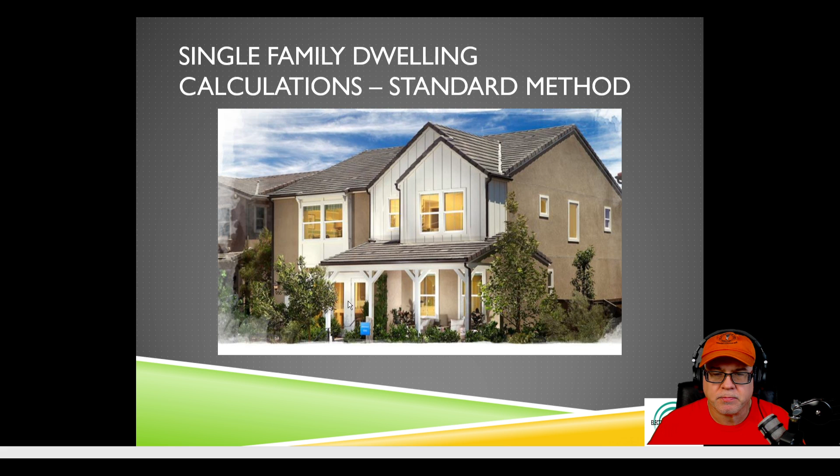All right, so let's look at what we're talking about here. We're going to be dealing in single-family dwelling calculations today, because we just want to make sure that you understand each little component of it, so it's easier to follow along. So where do we actually begin?

Okay, so in a residential application, you probably don't have a design drawing. You probably do have blueprints that you scratch on or draw on with a pen or pencil or something of that nature, right? But you probably don't have any engineered drawings or anything like that. I'm pretty sure you won't. I never have. So where do we begin?

So when we think about the calculation, I always like to say we need to talk about the actual space, how we develop a general lighting and general receptacle use space. And also I should mention, we are talking about the 2017 National Electrical Code tonight, not the 2020. I have to do a new video series for that because there are some changes. So that just creates more videos for me to do to teach people, okay? All right, we love teaching.

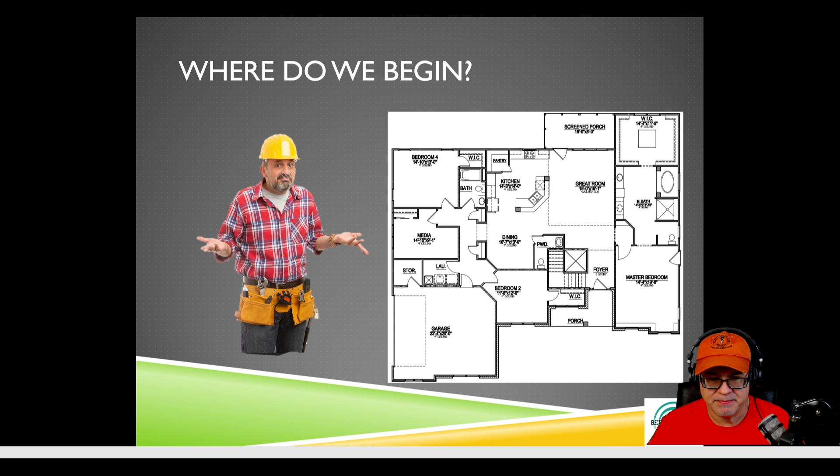All right, so let's look at our scenario tonight in our example. We have a dwelling, and we're going to assume the water heater, clothes dryer, the counter-mounted cooking units, wall-mounted ovens, and electric heating are in kW ratings, and we're going to assume, as the code also assumes, that it is considered equivalent to kVA. So when we're doing these calculations, watts or kilowatts is equivalent to kVA. At the end of the day, we're always going to try to break everything down into VA, okay?

But again, tonight we are going to really focus on a single-family dwelling, and we're going to talk about the standard method. Because like I said, you have to understand the standard, and we'll talk about the pieces. For those that are preparing for an exam, any of those little pieces could be on an exam. So understanding the pieces is the important part of the whole thing, all right? So let's get a little more into the presentation. We've got a dwelling unit. Its outside dimensions are 35 feet by 55 feet.

And we have a front porch that's included within those outside dimensions. Okay, 7 feet by 10 feet, and it's the front porch. And it's actually, like I said, part of those 35 by 55 dimensions.

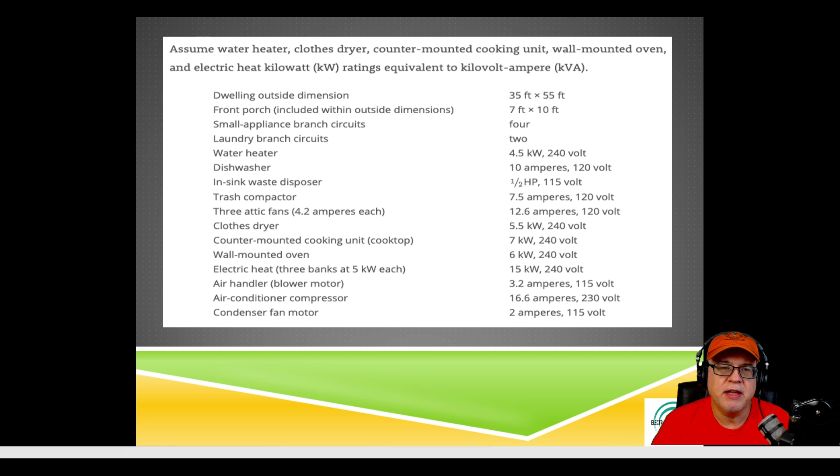Okay. The next thing that we have in our dwelling is an air handler, and it has a blower motor. That's basically what the air handler is. It's 3.2 amperes at 115 volts. Now, as we get into this, remember, that air handler is working whether it's blowing heat or it's blowing AC.

It works either way. So we have to make sure that when we're doing the comparisons that we add that air handler motor in with our heat and in with our air conditioning when we're doing the comparisons. Okay, so there you go.

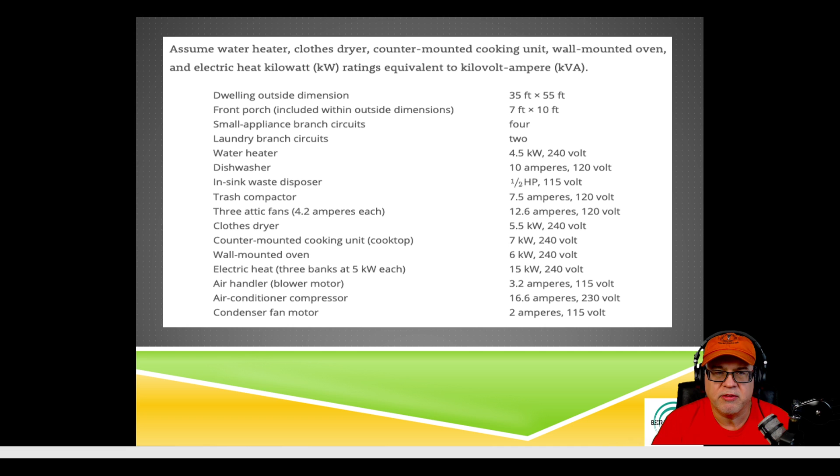The next thing we have, obviously, if we've got this air handler, then we've got an air conditioning compressor. That's outside, and that is 16.6 amperes at 230 volts. Okay, so we have an air conditioner compressor. And then, of course, we have what's called a condenser fan motor as well in that outdoor assembly, and that is 2 amperes at 115 volts.

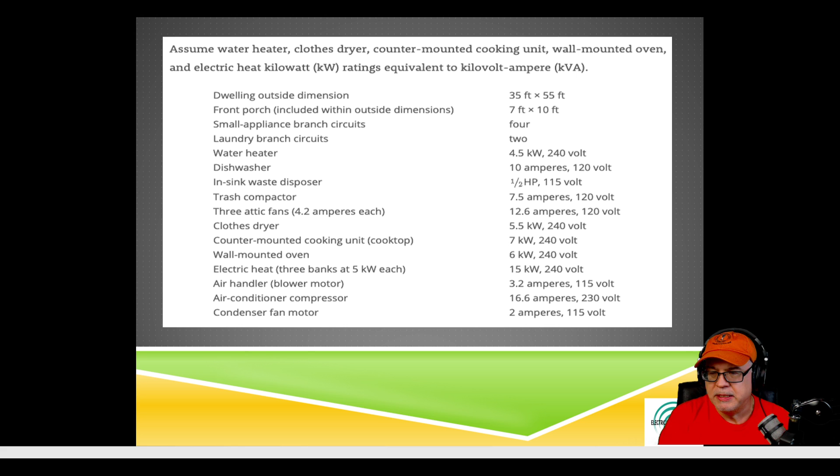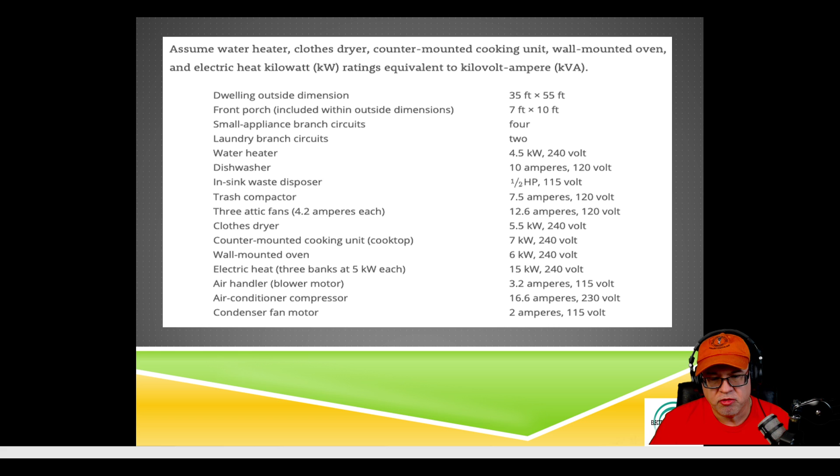Okay, so we have a pretty decent little house here, 55 by 35. We got all these equations in here. So as an electrician, for me, I have to get started in it and say, okay, where in the world do I even begin? All right? Okay, so let's get into it. Now, what do we do first?

Well, the first thing that we have to do with the National Electrical Code is realize that there's a table 220.12, or actually, before we even do that, we got to understand that there are instructions in 220.12. And those instructions are going to tell us for a residential dwelling unit that we take 3 VA per square foot. That is in 220.12. And in 220.12, it's going to reference us to the table 220.12. And that's where we see for dwellings, we're going to have 3 VA per square foot. You with me? Okay. So that's where we get our 3 VA.

Now, interestingly enough, this 3 VA in the 2017 code is going to encompass not just the general lighting, but also the general use receptacle loads as well. That's your receptacles that are all around the wall, okay? We're not talking small appliance. We're not talking the laundry, okay? We're just talking the general use receptacles that are around the walls and things like that, and our general lighting, ceiling lights, recessed cans and things like that.

Now, can people go wonky crazy on that kind of stuff? Absolutely. But it's considered general lighting, then that's how we're going to do it. We're going to kind of try to keep it as normal as possible. All right, so 220.12 sends us to table 220.12. That's where we get the 3 VA per square foot. We already know our values, so we're good.

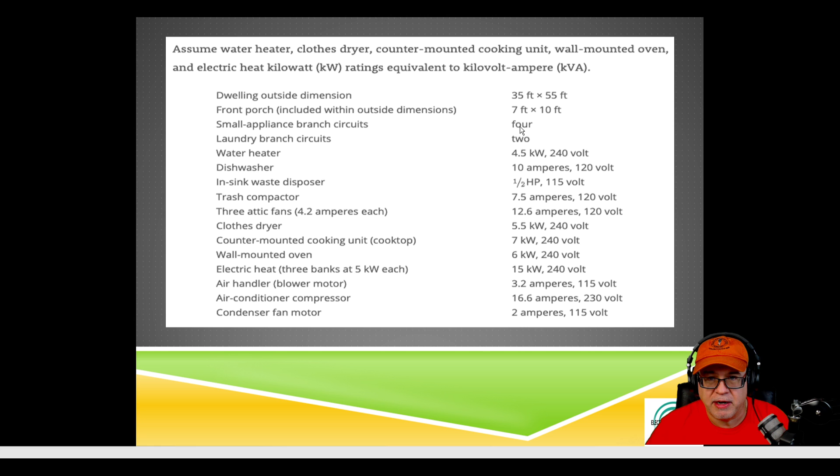I just want you to remember, as we're stacking these things, you have your general lighting, okay, based on your square footage. Now you have your small appliance, and we're going down our list, okay? So if we kind of look back, now we've covered this small appliance right here, these 4. We're good to go. Now, what about the laundry? Remember, it was 2 laundry, as you see right here on the screen, 2 laundry circuits.

Now, I have to have at least 1, and there's some exceptions to that rule if I'm like an apartment complex and I have a dwelling unit in an apartment complex and the laundry is not in the dwelling unit, but it's out there and it's available to everybody, then I have some allowances. But in our example, we're just talking about a single family dwelling. I'll do additional episodes where we talk about multifamilies and all these other type of things, but just focus on this because this is the low-hanging fruit stuff on an exam, okay? And there's a lot of tidbits in here that are fodder for exams, like 1,500 VA per circuit, things like that to remember, all right?

Now, based on 220.52(B), it tells us that we have to have a laundry branch circuit calculated at not less than 1,500 VA. Okay, we got 2. Got to have at least 1. We got 2. And it also tells us that we can include this also in our demand factors in Table 220.42. And we'll look at that in a minute. Right now we're just stacking. We're trying to get our VA. So in this case here, it's 1,500 VA times 2. That's 3,000 VA. Okay, so we're adding that again to the list. Okay.

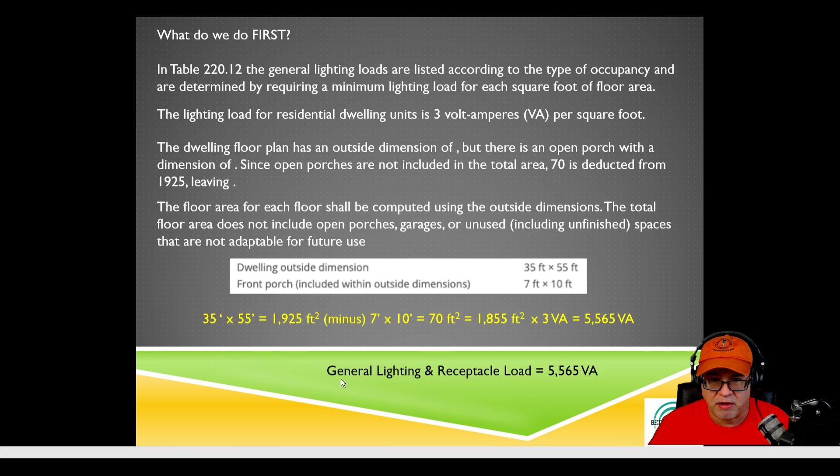All right, so now let's get to what we're talking about here. So now we've got the 3 loads that we just calculated out, okay? And hold on one second. All right, so now let's bring the general lighting and receptacles, that small appliance branch circuit, and that laundry load, let's bring them together now because we want to apply some demand factors that the code allows us to do. So in this case, we had 5,565 VA for general lighting and receptacle, 6,000 for our small appliance, 3,000 for our laundry.

Now, before we can apply any demand factors, we need to know what says they apply and how they apply. So Part III of Article 220, which is the standard method, is for calculating services and feeders, load calculations. And 220.42, the general lighting, says we get the permission to use Table 220.42. It's permissive. We get the permission to do it.

If you want to size it without any demand factors and you want to end up with an overly large service, you can go for it, okay? But on exams, we're always looking for the best value. And again, most people are going to use the optional method anyway, but we've got to know how to do this method so that we can size neutrals as well, so we might as well understand it.

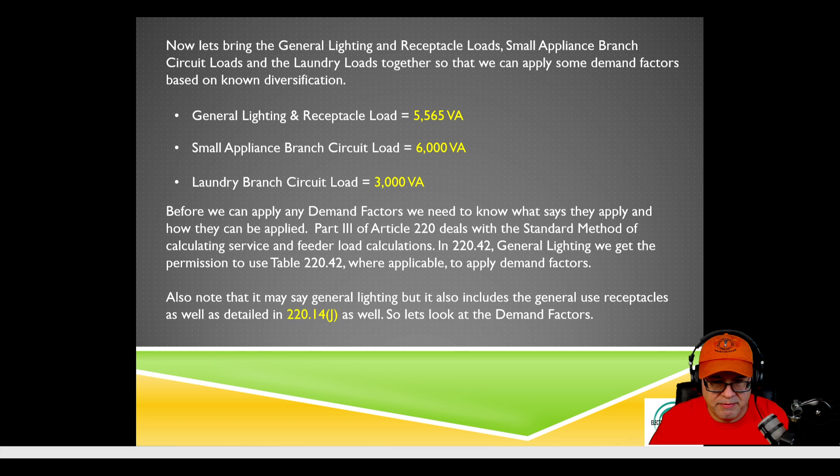So we get permission to apply demand factors. We don't have to use them, but we get permission. And anybody that doesn't would be crazy because it would result in an excessively large service if you didn't get to apply some demand factors, okay? Now, I also should note that it may say general lighting, but again, we talked about it earlier. It also does include all the general receptacles that we detail in 220.14(J). It includes all of those as well.

All right. So let's look at some demand factors here. We've got all our values on the screen. We have a screenshot of table 220.42. And so now that we see it here, we actually can start working it out. So we have the total values. We add them all up: 5,565, 6,000, and 3,000. And I'm going to do it with you. We're going to double check the math. So 5,565 plus 6,000 plus 3,000 equals 14,565. And that's what we have here.

Now, what does the code say? It says that we can apply 100% to the first 3,000. Okay. So the first 3,000 gets 100%. And then, of course, the next 117,000 is at 35%. So let's take that 14,565 and take 3,000 away because we'll add that later. We take it away so we can work on the remainder because we already know that the remainder is nowhere near over 120,000 or the next 117. It's not even close. So I take that 14,565, I take 3,000 away. That leaves me 11,565.

Now, to that 11,565 I get to apply that 35% demand factor. And remember what I've told you in previous videos, and people listening over in the podcast, when we're using table 220.42 or any calculation in 220, I am able to take anything that's 0.5 and round it up. Anything that's below that, I can drop off. So let's look at the 35%. Another thing I've told y'all, anytime I have a percentage, I want to convert it to a decimal for my calculation. Yes, my calculator probably does it fine, but just get into practice doing that. So 35%, you start at the right side of the 5, you move it 2 spaces to the left. Now it's 0.35.

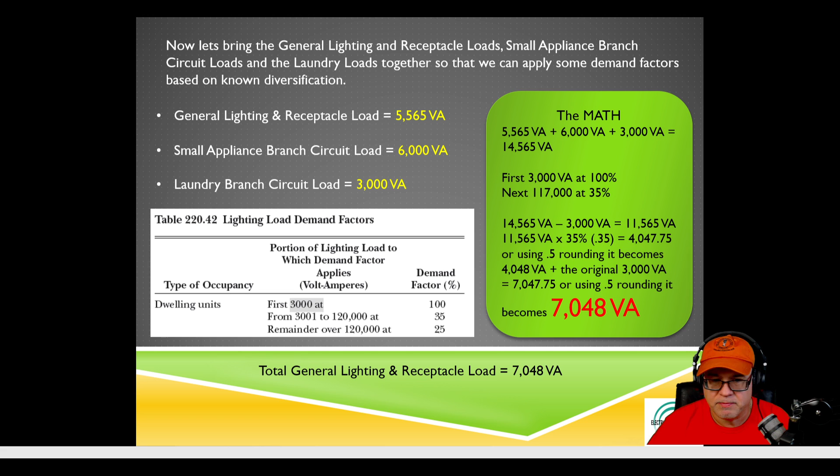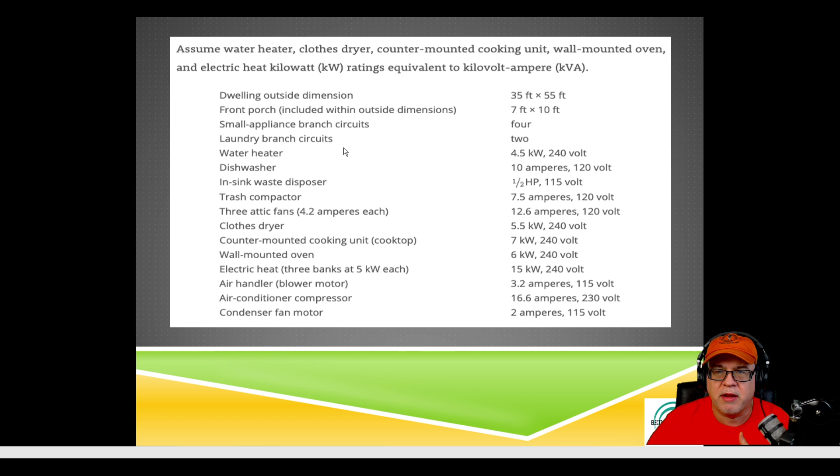So now we've moved through these. We've covered the small appliance. We covered the laundry. We applied all of the demand factors. Now we're going to start getting into appliances. So what does the code say about that? It says the term appliance designates utilization equipment commonly built in standard types. This is a definition from Article 100 so that we can understand what appliances are. So a washing machine's an appliance, a dryer's an appliance, a disposal's an appliance, things like that.

Now, ranges are appliances, okay? But they have their own rules for calculating in 220. That's 220.55, so we don't add those here. A water heater is an appliance. It's just understanding what appliances are. So a garbage disposal is an appliance.

Trash compactor is the appliance, those type of things, okay? Just kind of keep the way that we're flowing and understanding it, all right? Now, the dryer is an appliance, but a clothes dryer is treated separately because it has its own calculation value under 220.54. You with me?

All right, now, again, for the purpose of these calculations, hopefully without having to remind you again, kW is the same as kVA. They're synonymous in our calculations. Horsepower ratings must be converted to VA before they can be utilized in our calculation. These are kind of steps to remember. Any of the motors that we're dealing with that are in horsepower, we're going to have to convert them into an actual VA value, all right? So we want to make sure that I convert all of my horsepowers, okay?

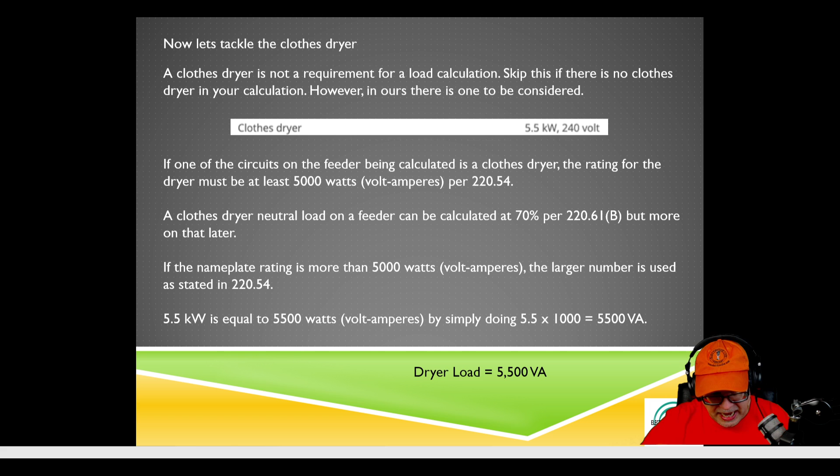So now, if the nameplate rating is more than 5,000, obviously ours is, so we took 5,500. So 5.5 kW is equal to 5,500 watts, which is synonymous with VA, and that's what we want, VA. So it's 5.5 times 1,000. That is 5,500 VA. That's the next calculation we add down. We're adding 5,500 VA to our calculation. Now, we're moving through this thing. It's pretty simple. We'll look at how this all shakes out. All right? So let's look at the next, what we're dealing with.

Now, the next one we're dealing with is household cooking appliances. Now, we're talking about ranges, wall-mounted ovens, counter-mounted cooking units, etc. All these things are household cooking appliances. Now, they're not required, to be honest with you, for a load calculation if they weren't given. It seems kind of crazy to not have them in a dwelling, because we have cooking requirements to have a dwelling unit, so it seems odd. But I guess you could cook with gas. You have options there. Now, if they're in your calculation or in your question or actually in the physical dwelling that you're wiring, then you have to account for them, okay?

So, now, if there's no cooking appliances rated over 1 3/4 kW, then there's no need to add anything to the calculation. You know what I'm saying? However, in our case, we do. We have a counter-mounted cooking unit, which is 7 kW, and we have a wall-mounted oven, which is 6 kW, okay?

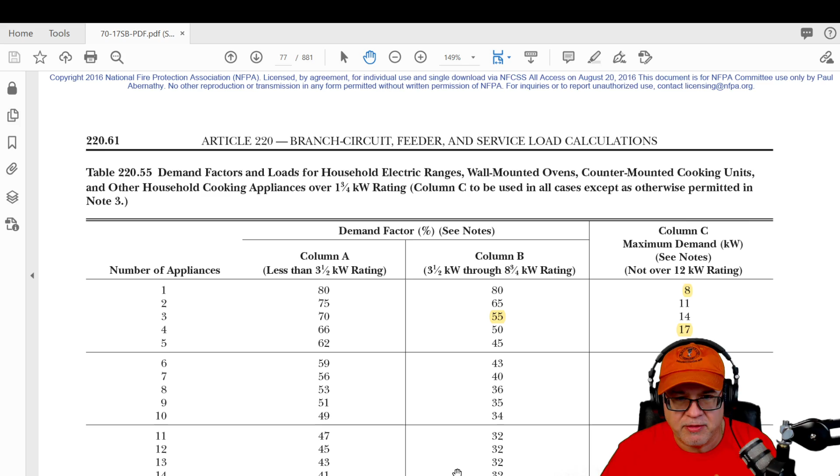So let's go to 220.55, this table right here, and see what we've got. For those that are watching, half of me is blocking column C. But over on the podcast, we're looking at table 220.55, and we want to look at some notes. We're going to scroll down and bring them up in the middle of the screen. What we're looking at is note 3.

It says, over 1 3/4 through 8 3/4. In lieu of the methods provided in column C, it shall be permissible to add the nameplate ratings of all household cooking appliances rated more than 1 3/4 kW but not more than 8 3/4 kW. In our example, neither one exceeded that; they fell right in the sweet spot to use note 3. It says, and multiply the sum by the demand factor specified in column A or column B for a given number of appliances. We had 2, we added them together, and we took the sum.

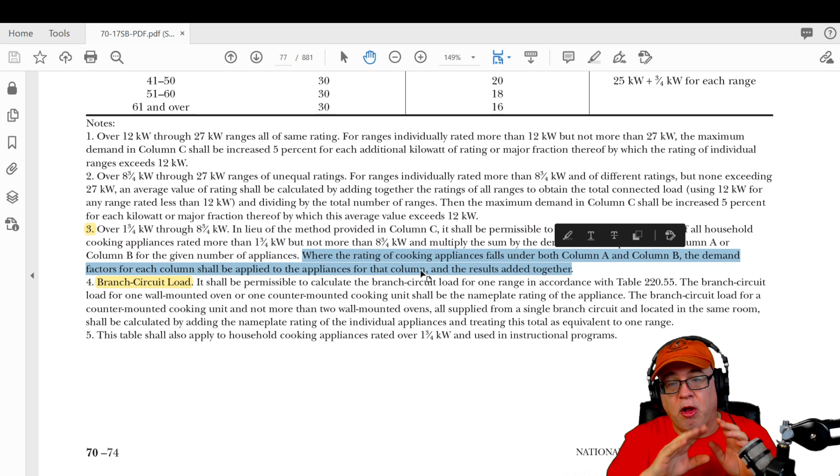Now, it says where the ratings of the cooking appliances fall in both column A and B, the demand factors for each column shall be applied to the appliances for that column and the results added together. So if I had a cooking unit under column A and one under column B, I would solve A and solve B, and then add the sums together, all right?

Okay, but again, in lieu of. So the reason we're doing this is because they both fall under C, but 2 appliances would have required 11 kW. And because they both fell under B, in our case we were able to apply a demand factor, and that's why it resulted in less for our application. So we applied 65%.

So we compared the 2, and we determined that use of column B resulted in the smaller value. So that's why we used column B. I remember now that I wanted to use that to highlight it because I wanted to be able to explain to you what happens if it falls under 2 different columns.

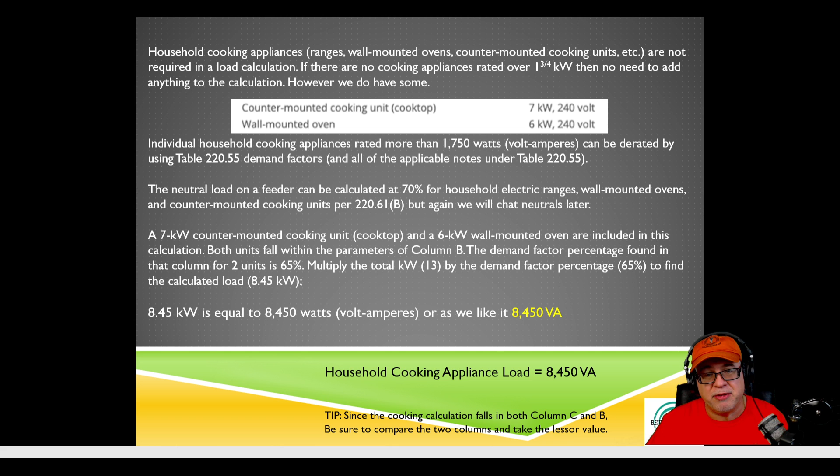Solve each one independently and then add the values together. And I can do that in lieu of using column C. Now, if column C is the better result, then I'm going to use column C, whichever gives us the best result, the lowest result. All right, so I just want to make sure I reiterated that for everybody. So that's a value we write down. So we had another value that we jotted down, and that was the cooking.

Now let's move on to the one that causes people more confusion: we get to take the larger of the 2. We compare the 2 and we get to discard the one that's less. So let's look and work this out. The smaller of the 2 non-coincidental loads gets to be omitted. Non-coincidental means they're not designed to run at the same time. There's some kind of fail-safe mechanism, thermostat system, whatever, that keeps the 2 from operating at the same time.

However, I will remind you that air handlers will be operating either way. They're going to be going all the time, whether it's heat or AC. So, things to remember. 220.60 is what tells us that we can omit the smaller and take the larger. By definition, non-coincidental means not occurring at the same time. A dwelling's electric heating system and air conditioning system may not be coincidental loads.

So you have to be careful, because this only applies if they're non-coincidental. You've got to know what you're dealing with. The heating system and the air conditioning may be non-coincidental loads. Most of the time they are, but you've got to be careful. Normally it is, and we don't have a problem. So now let's look at this here.

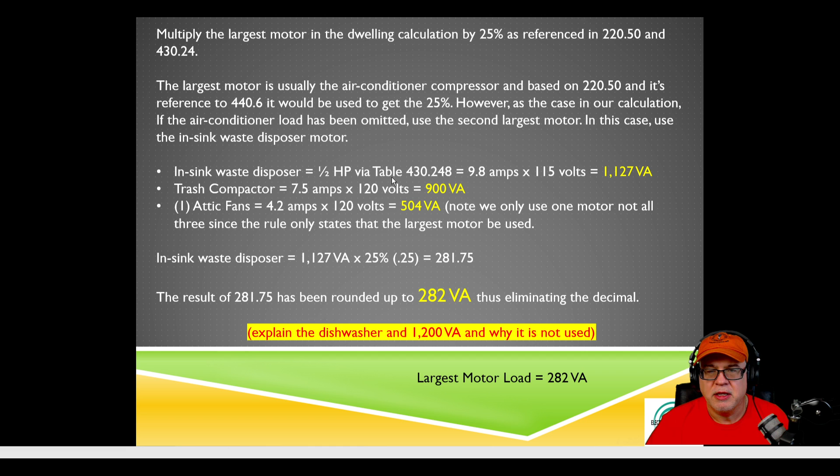282 versus 300. I'm just telling you, for whatever reason, we do not use the dishwasher. But if you want to, go for it. It's not going to hurt anything. It's not going to change our overall value, I can promise you. All right, so now we add all these up. And, of course, you can agree to disagree with me.

Perfectly fine. All right, so it's 7,048 plus 6,929 plus 5,500 plus 8,450 plus 15,368 plus 282 equals 43,577. Now, since this is single phase, 240 volt, and we're sizing services, we're going to take that 43,577, and now we're going to get into good old Ohm's law, and we're going to take the VA and divide it by 240.

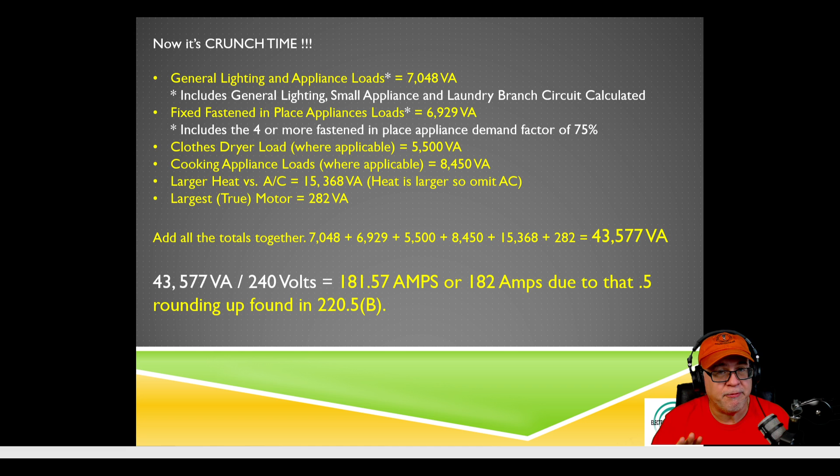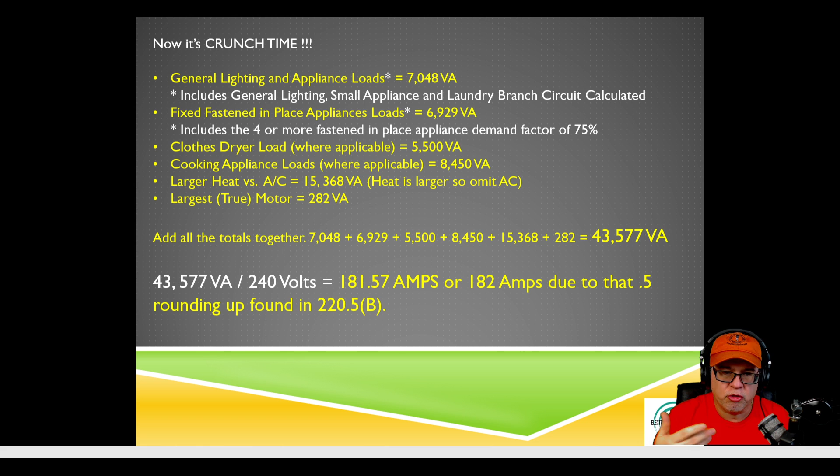That is 181.57. And since it's 0.57, we're going to round it up to 182, due to that 0.5, which is referenced in 220.5(B) if you want to know where the rounding rule comes from. Since it's in 220, all calculations associated with 220 are privy to that ability to round. Now we need to find out the minimum amperage rating required for our service and feeders that was being calculated.

So the service or feeder overcurrent protective device must be higher than the number found in line. A list of standard ampere ratings for fuses. In our case, we had 182. Nothing corresponds to 182 in 240.6(A), so we went up to a 200 amp device based on 240.6(A). Now, everybody might say, well, that's our device, but what about the conductor sizes?

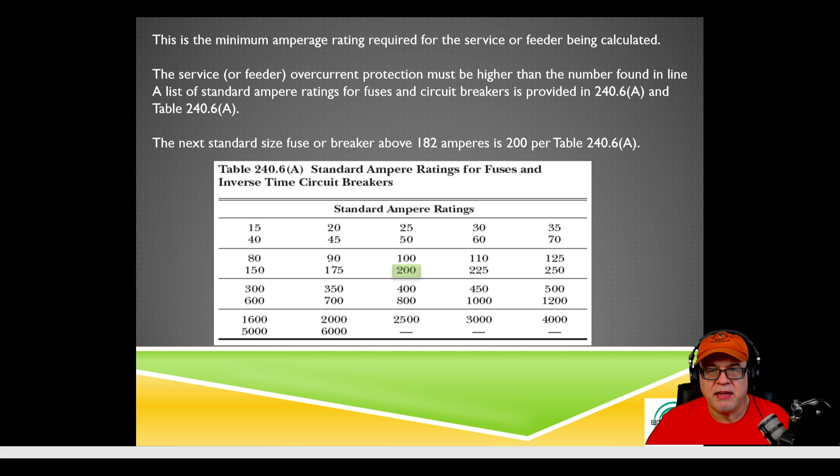Well, remember, since this service is falling between 100 and 400 amps, and it's a single family dwelling, and all that good stuff applies, then and only then do we get to apply 310.15(B)(7). In our case, we're going to use B7.1 because we're dealing with a service. If it was a feeder, it would be B7.2. Incidentally, I said I wasn't going to talk about 2020 code, but this is 310.12 in the 2020 code. I just felt like throwing out the change for you.

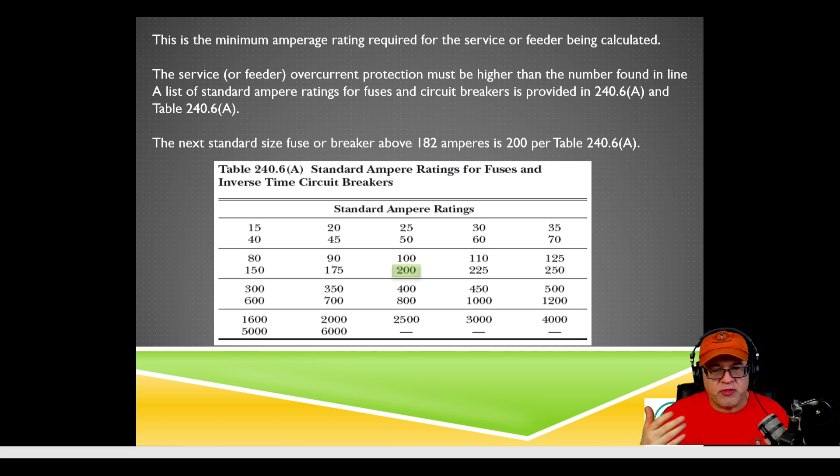Now, let me make something clear. If you wanted to size the conductors for 200 at full rating, go for it. On an exam, they want the best possible answer. So, since we can apply 310.15(B)(7), it says, for a service rated 100 through 400 amps, the service conductors supplying the entire load associated with a one-family dwelling, or an individual dwelling unit in a two-family or multi-family dwelling, shall be permitted to have an ampacity not less than 83% of the service rating.

Now what is the service rating? It is the values given in 240.6(A). So if the breaker is a 200 amp, then that is your service rating. If the feeder is feeding a 200 amp breaker, then that is your service rating. 310.15(B)(7) used to have a little quickie table. Then it disappeared. Then it ended up in Informative Annex D for calculations.

Now in the 2020 code, it's back again. But all of this was based on the 83%. And remember, to use this, all the rules have to apply. So let's do it. It only applies to 100 to 400 amp services or feeders.

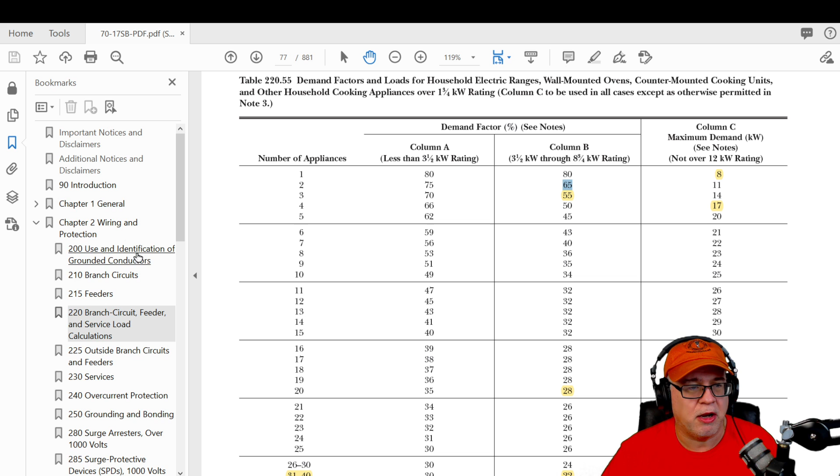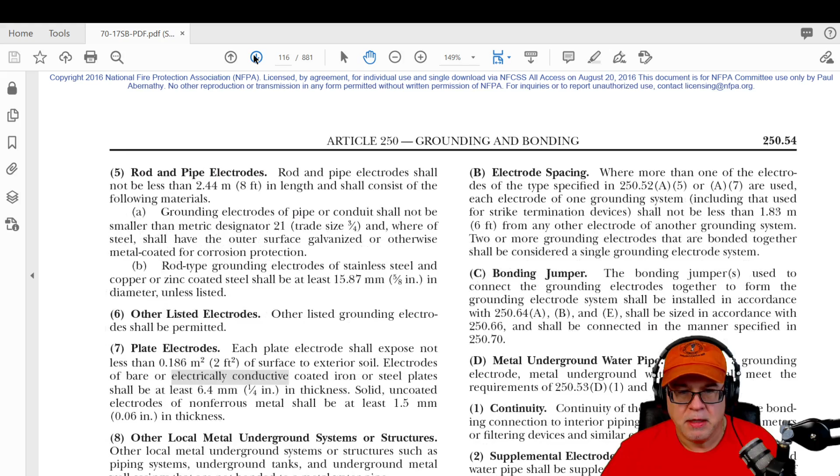So I'm going to go to the NEC, and I see all of my people that follow over on the video stream. I have a sharp bunch of people. I only hang out with sharp people, by the way, and all of the people that follow me and listen to our stuff are sharp people. They know I love them. And so we're going to go over to 250.66. I'm not like most educators. I actually do appreciate the people that learn from me. I'm just saying.

I want to make sure that we said it was 2/0 copper or 4/0 aluminum. So if we're dealing with copper, it's 2/0, it'd be right here. And it's a water pipe ground, so it would require a 4. So possibly the folks over on my YouTube stream picked the wrong conductor, because it's based on the size of the service conductor. Here it was a 2/0, so it needs to be a 4. We didn't say ground rods. We said water pipe ground. So a 4.

So I can do this to all them over there that might have got that wrong. I will do this for them.

And if it's 4/0 aluminum, right here, it's also going to be a 4 copper or a 2 aluminum.

All right, so let's get back to the PowerPoint presentation. I'm not going to hear the end of that one, okay?

So now, that disappearing table, again, I wanted to show you some of the graphics of how this would look. And so this is an example where the power comes in, and it hits the panel. And this is where we could apply that value, that 83%.

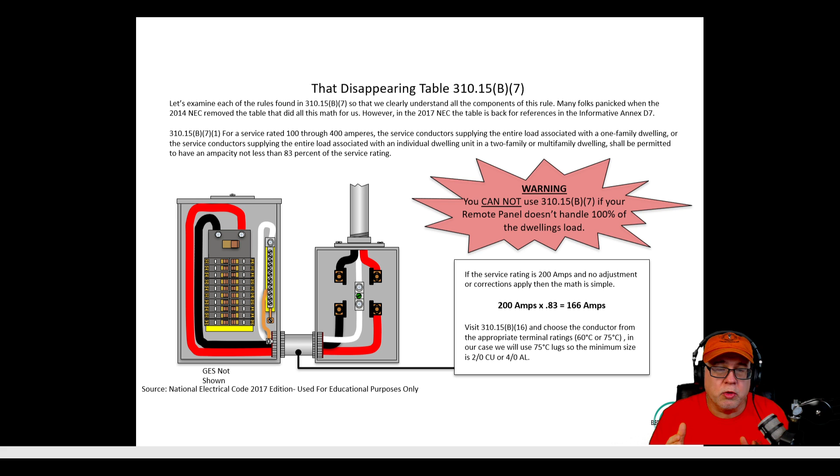So like we did, 200 times 0.83 is 166 amperes, okay? Now, if it doesn't handle 100% of the loads, then I can't apply 310.15(B)(7). So what would you do? You would just use the regular ampacity values that are in 310.15(B)(16), okay? We're using this to give us an advantage. If it can't meet the rules, then I can't use the advantage. You with me? All right.

So here's another example of where I could use the actual 83% rule, or the allowance of this. Say I have the service coming in, and this is a situation where I have the emergency service disconnect now required in 2020 code. I said I wouldn't keep saying 2020. But let's say this is on the outside of the building, and of course, it also applies to 2017. If I want the panel to be further into the building, then I have to put it outside or nearest point of entry per 230.70(A)(1). So in this case, I've got the service disconnect outside, and I've got the remote panel inside of the actual dwelling.

Okay, well, see this? If this panel right here in this feeder is seeing 100% of the loads, so it's simply feeding through, then I can apply the 83% to here, and I can apply it to the feeder conductors as well, all right? And then I'm okay, as long as I meet those rules. So like we did the example, and we're going to go to neutrals in a second here. So you see what I'm doing here? If these rules apply, I can do it. If the rules don't apply, have no fear, don't panic.

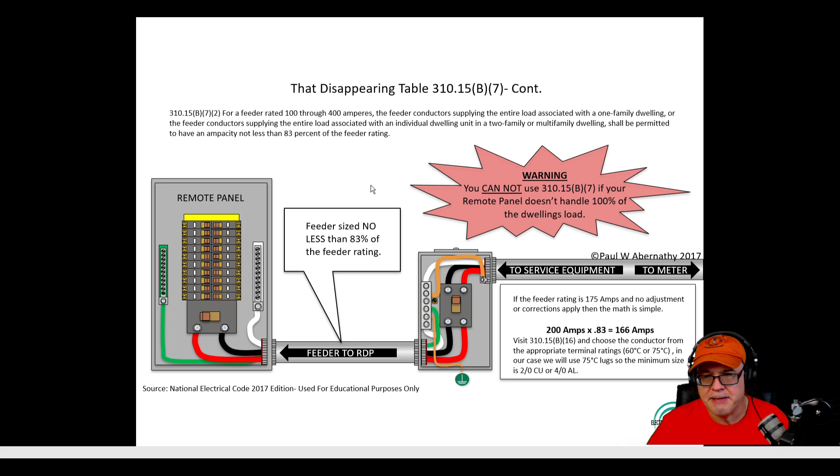Then you just size it at 200 amp rated breakers, and you go to 310.15(B)(16), and you size whatever conductor can actually handle the 200 amps. And I believe if you didn't use this, then it would require you to have a 3/0 copper instead of a 2/0 copper. Not the end of the world, but there is an advantage to being able to use 310.15(B)(7), okay? All right, so now let's look and see what we're doing for the neutrals.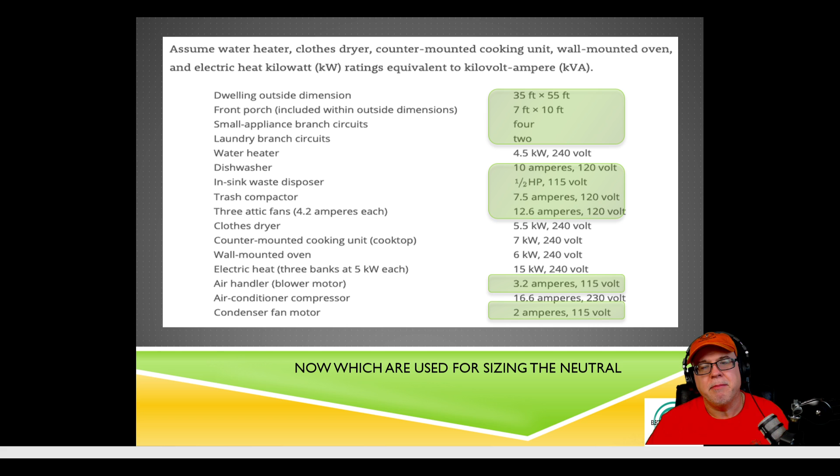So here, again, everything's the same. Nothing changed. The only difference is what I've highlighted are all of the things that are neutral loads. And all of these have to be considered when sizing the neutral, okay? So again, all of those calculations that we did up front for the dimensions and the 7 times the 10 that we took out and the 4 small appliances and laundry, all of those are utilizing 120 volt loads. So there's a neutral involved, and we've got to calculate that as neutral. All the 240 volt loads don't utilize the neutral except for the clothes dryer and the cooking appliances, and we're going to take those at 70%. So I don't have them highlighted here because they're going to be treated separately in a second.

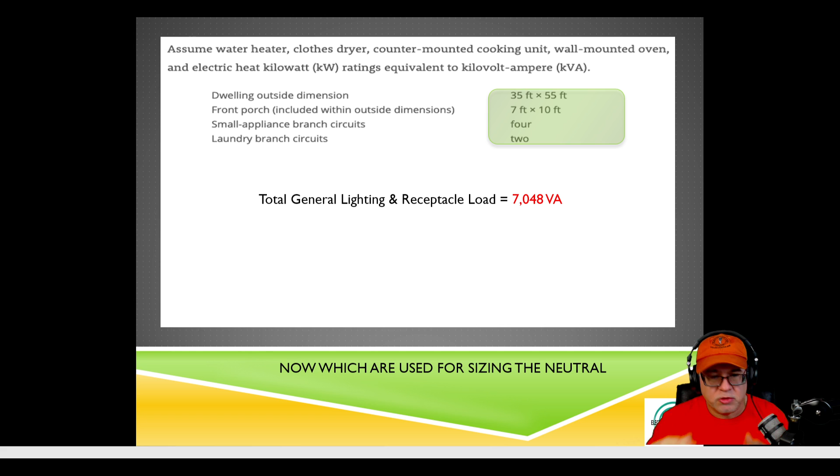All right, so remember that general lighting load that was 7,048? Well, that's all neutral load, so I'm taking that. Now, remember the appliances? Well, the water heater doesn't count, but all the other ones count. They're all 120 volt loads, right? So we already did all this and we knew it. The only difference here is we took out the water heater, okay? So in our case, it was 3,554, okay? Now we want to make sure that we're right with that. So I'm going to do some calculating.

1,200 for the dishwasher plus the in-sink waste disposal, which was 1,127. You can do this with me and make sure that I'm still on this so that everybody can see it. Okay, yes, I am. Plus, we're going to now add the trash compactor, which was 900. Plus, we had those 3 attic fans. And again, we can go back now to adding them all up together. So that's 1,512.

And that is 4,739. Well, guess what? I still get to apply the demand factor to this as well. Okay, I still have 4. So even though it's a neutral, I still get to apply it. So that would be times 0.75, and that is 3,554.25. That 0.25, I drop it off, and I just take the 3,554.

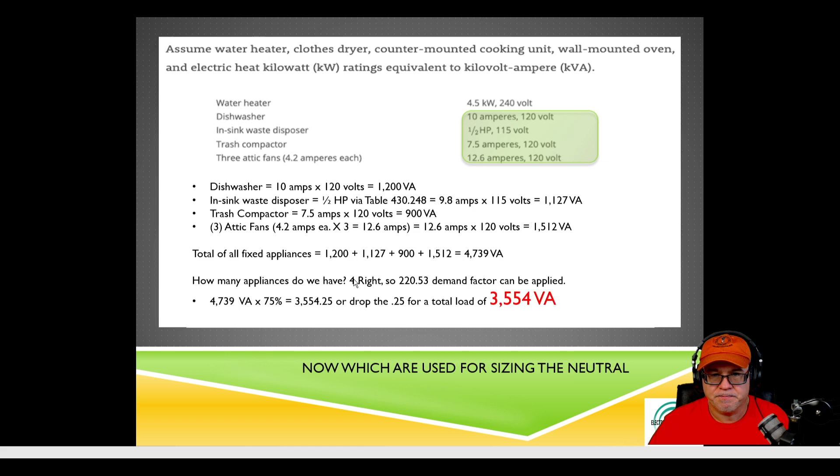Now, again, I get to also go on to looking at the clothes dryers, the cooking, and the wall mounted. We said we were going to tackle this, okay? So the 5,500 is 5,500 watts. That's 5,500 VA, okay? And we take that at 70%. So 5,500 times 0.70, and that is 3,850, okay? So we write that down.

That's our neutral load. The next we had was the 7 kW counter-mounted cooking unit and the 6 kW wall-mounted unit, okay? So we already did this calculation. We'd already done it, okay? So we take that 8,450 VA times 70%. So 8,450 times 0.70, that is 5,915. Write that down. So we have value.

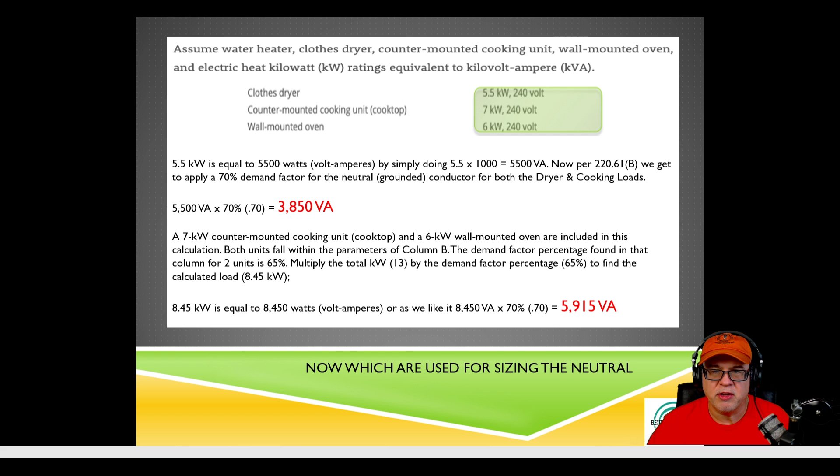So what do we got so far? We've got 7,048, 3,554, 3,850, which was the dryer, and we have 5,915 VA. That was the cooking combined. Okay. Now let's look at the AC versus heat.

Okay, because remember, when the AC is running, then we do have some loads that could be running here. So in this case, remember the little exercise that we did with the AC versus heat? So let's kind of work this out because we do have neutral loads that we do want to take into account, okay? Because they will be running when the air conditioning is running. So when we're doing neutrals, we definitely want to count that load, okay?

Remember that heat? That heat was 240 volts. So when the air conditioning is running, we do need to take the neutral count because there is going to be neutral loads. Now, the air compressor we get to ignore because that's 230. We don't worry about that. So it was the condenser unit, or excuse me, the condenser fan motor at 2 amps times 115 volts. That was 230 VA. You remember we did that earlier.

And you remember that old air handler, 3.2 amps times 115? That is 368 VA. Okay, now they will be running again, regardless of what's going on here, okay? If the AC is running, both will be running. If the heat's running, the condensing fan will be running. The air handler motor will be running. When we're doing AC in the summer, we've got neutral loads. Obviously, the air handler is going to be going and the condenser fan is going to be going, and it is a neutral load. So that's why we're doing the neutral loads, okay?

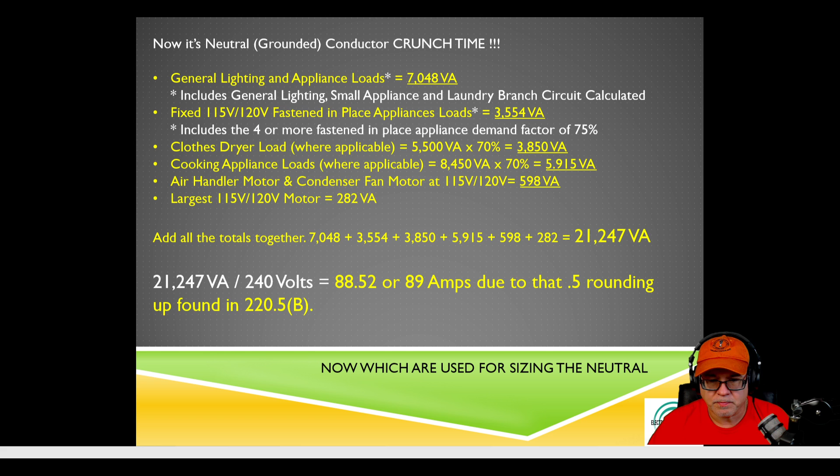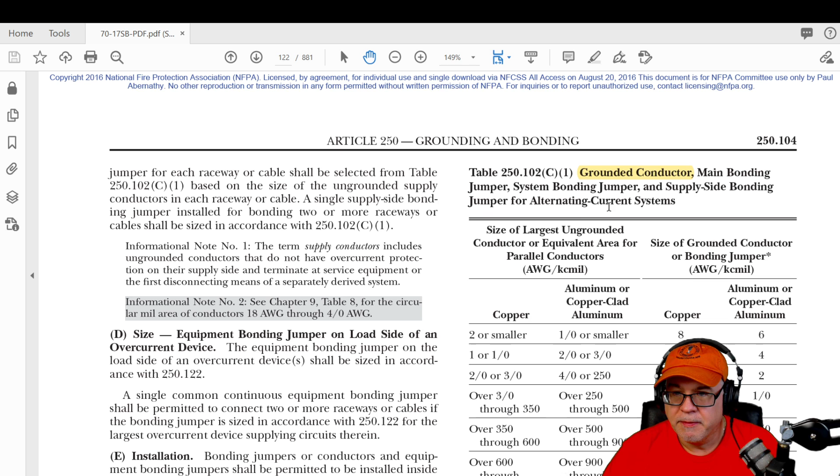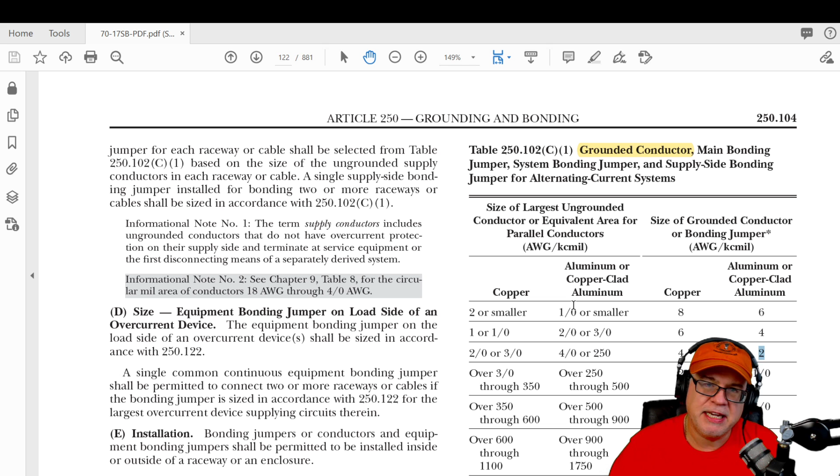Since we're sizing it, let's go into the NEC. The first thing I like to do is run down here, and you see it says grounded conductor right here. The largest ungrounded conductor in this case was the 2/0. So if it's copper, it's got to be at least a 4. If it was a 4/0, then it's got to be at least a 2 aluminum for my grounded conductor, or our neutral. Now, we still have to base it on the calculation, and we know that it was 89 amps.

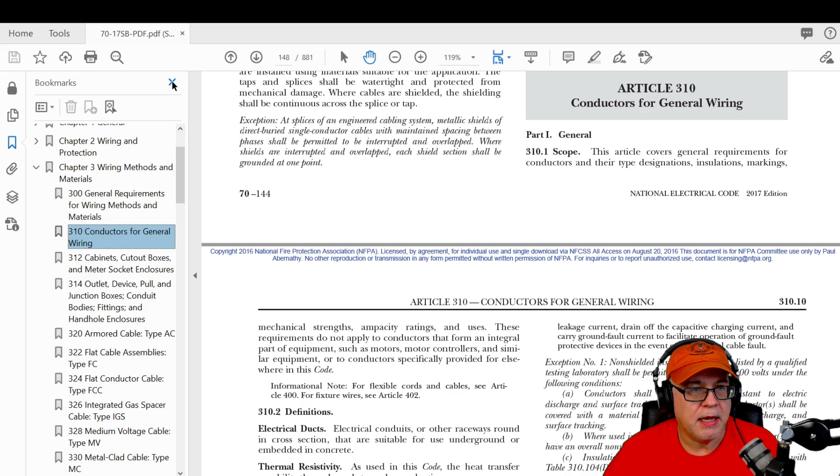So we're going to go back to 310.15(B)(16) and select a conductor under the 75-degree column, and we'll just say copper. We look for 89 amps, and it looks like 85 is too small, so in this case it's a 3 gauge, a minimum of 3. Now that's interesting, because even at 87 it still would have put us over the 4, so it puts us in a 3 gauge. It was close, but it didn't make a difference. So in this case, it would be a minimum of 3.

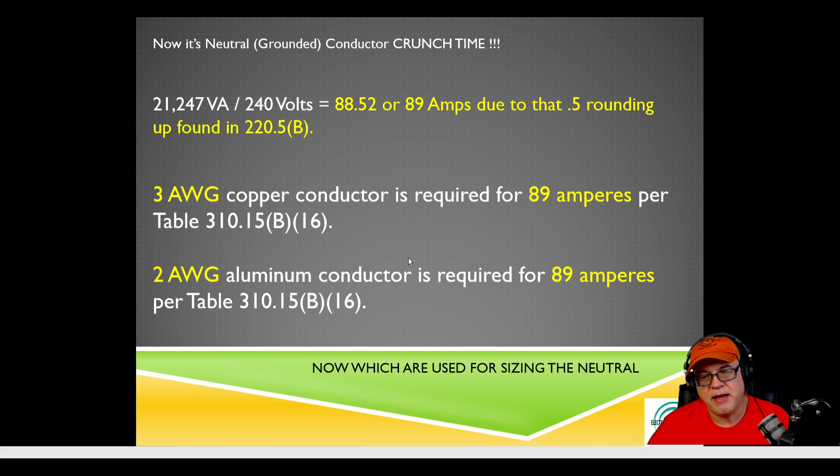And again, 3 is going to be larger than the 4 required in 250.102(C)(1), but we based it on the calculated neutral loads using the standard method, mind you. You can't use an optional method to do that. And that's how we came up with our sizing for the neutral conductor. Again, here's what we did: 21,247, 89. We saw that it's a 3 copper, and it was a 2 aluminum. I could have flipped the screen, but I kept myself honest here.

So that was our presentation for tonight, giving you all the necessary concepts. We can dig into the weeds of certain things like heat pumps, but my point is if you take it systematically, and when you get to the application for heating versus cooling you slow down and determine whether you had separate heat or a heat pump, it's just percentages. It's just values. It's not complicated. I wanted to give you the basics of how you apply it. I went a little long tonight to make sure we covered everything.